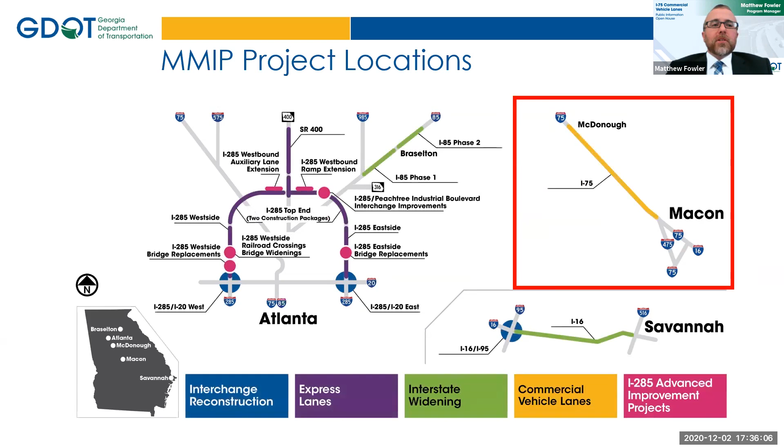...shows where the MMIP projects are located. Many of the projects are located around Metro Atlanta, along I-285, up State Route 400, and I-85 north of Atlanta. We have 2 projects near Savannah to widen I-16 and improve the interchange of I-16 and I-95 as the Port of Savannah continues to grow. The I-75 CVL project south of Atlanta on I-75 will construct commercial-only vehicle lanes along I-75 northbound from I-475 north of Macon to the vicinity of State Route 155 near McDonough. This map shows the gravity these projects will have on many of Georgia's metro regions across the state.

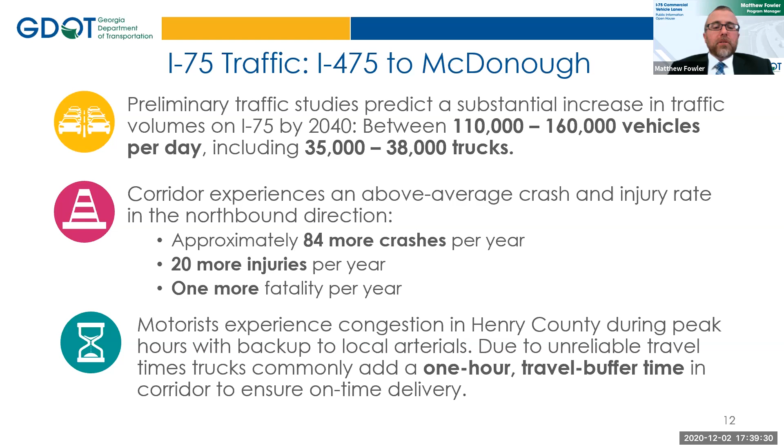Preliminary traffic studies predict a substantial increase in traffic volumes on I-75, with between 110,000 to 160,000 vehicles per day, including 35,000 to 38,000 trucks. This corridor experiences an above average crash and injury rate in the northbound direction. With all this movement of freight, combined with significant expansion of the Port of Savannah and continued population growth in Metro Atlanta, traffic volumes, congestion, crashes, and injuries are rising and will continue to increase unless addressed.

And now a project overview. The I-75 Commercial Vehicle Lanes project includes the design and construction of commercial vehicle only lanes, CVLs for short, along I-75 northbound from I-475 north of Macon to the vicinity of State Route 155 near McDonough, plus a new auxiliary lane on I-75 between State Route 155 and State Route 20. The proposed improvements involve the addition of 2 non-tolled commercial vehicle lanes.

The commercial vehicle lanes will be barrier separated from the existing general purpose lanes and will be located typically along the outside, the east side of the roadway, as depicted in the rendering below, except through the city of Forsyth urban limits, where the commercial vehicle lanes are proposed to transition to the median. Major structure work will be required to accommodate the new commercial vehicle lanes, including 27 new bridges, replacements, or widenings. Lastly, the project will accommodate future direct access ramps to a potential Bethlehem Road interchange in Henry County along I-75.

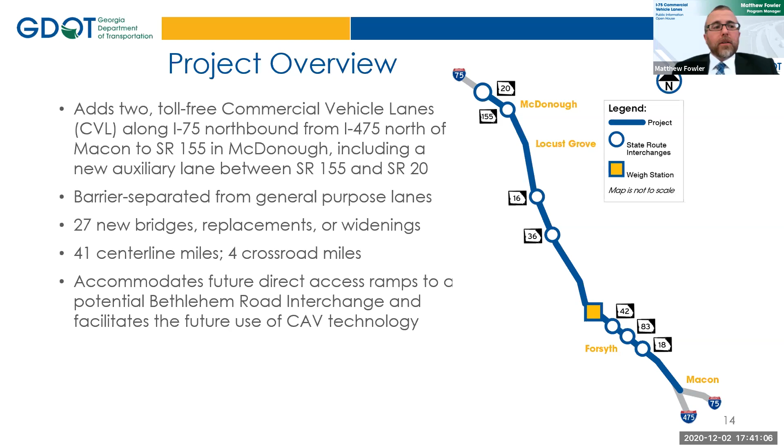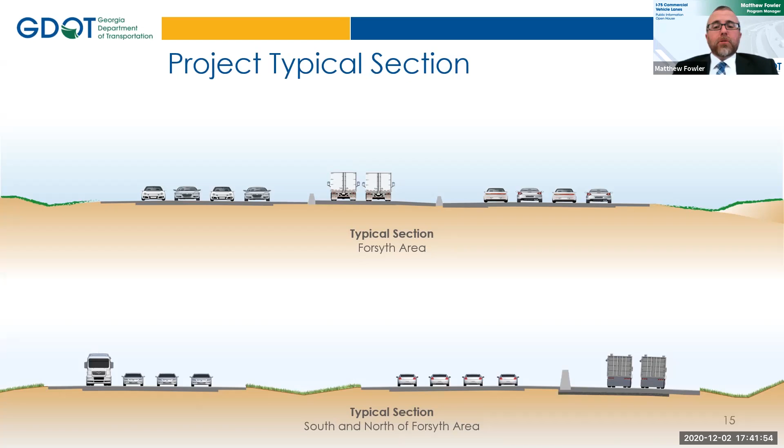As discussed on the previous slide, the new commercial vehicle lanes will generally be located along the existing outside northbound shoulder, as shown on the bottom of the screen. Within the Forsyth area between State Route 18 and State Route 83, the commercial vehicle lanes will move into the median to reduce impacts to the many businesses and residences located along the corridor. This is depicted on the top of the screen. It should be noted that no mainline work to I-75 is being proposed in the southbound direction anywhere in the corridor, and the existing number of travel lanes will not be reduced in either direction.

This project is the first of its kind in the country due to the project being non-tolled truck-only lanes. The commercial vehicle lane project will improve the safety and mobility for all users by separating commercial vehicles and passenger vehicles. The commercial vehicle lanes promote freight mobility from the Port of Savannah and promote continued economic development along the I-75 corridor. Georgians will benefit greatly from this project by reductions in delay through added capacity, increased safety by separating passenger car and freight traffic, and improved freight mobility, maintaining Georgia's competitiveness throughout the region.

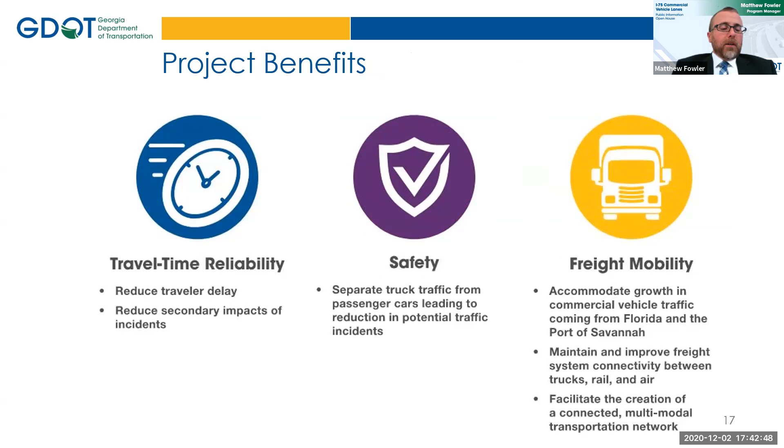The project will consist of an approximate 41-mile-long new roadway construction alongside existing I-75 that begins just south of the I-475/I-75 interchange north of Macon and spans through 5 counties. The department has developed a preliminary access and signage plan for trucks to enter and exit the commercial vehicle lanes. The main objective of the plan is to maximize truck utilization in the commercial vehicle lanes, thereby minimizing truck utilization of the existing general purpose lanes without precluding any truck access to the existing service interchanges via the general purpose ramps. This graphic and the following slide graphic illustrate the access points at the southern and northern termini, along with 6 intermediate entrance and exit access points.

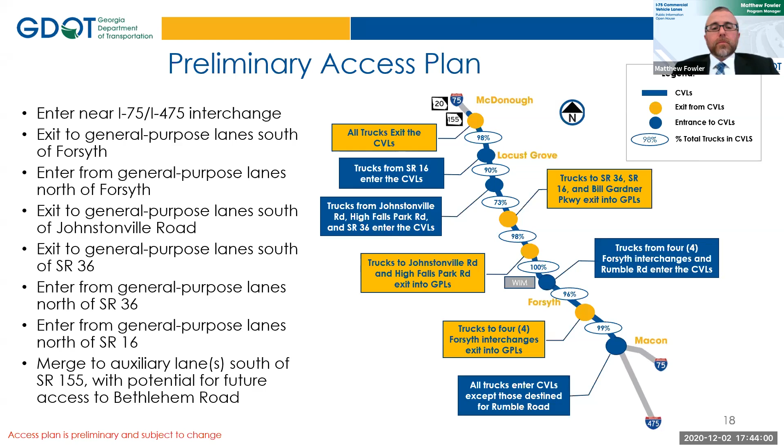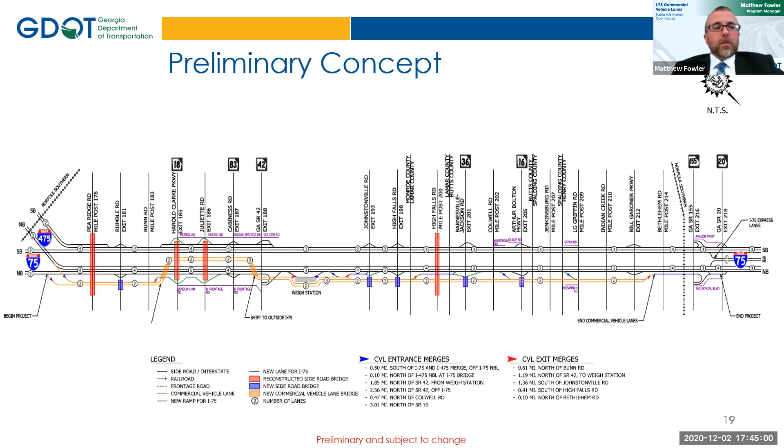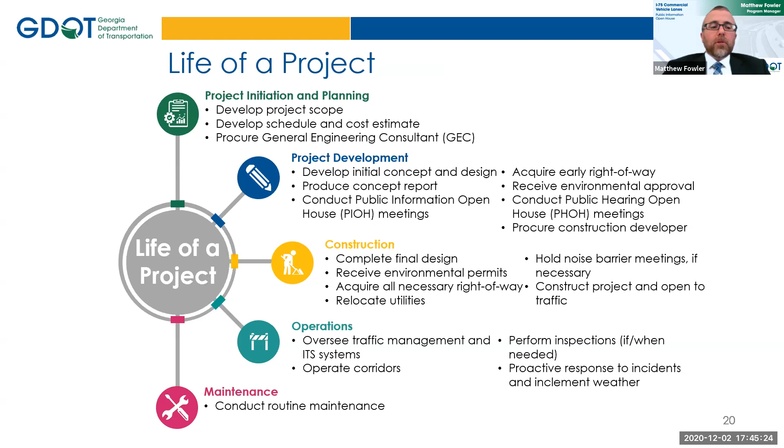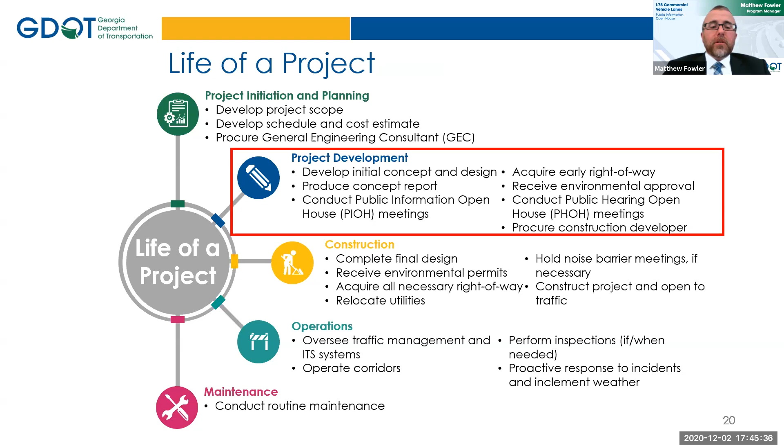Georgia DOT and all highway projects take many years to plan, design, and construct. And once a project is completed, the focus shifts to ongoing operations and maintenance. A transportation project like the I-75 commercial vehicle lanes requires a lot of people to bring the project to life. Currently, the I-75 commercial vehicle lane project is in the project development phase, and we will discuss a number of these current and upcoming activities in the next few minutes.

The department is working diligently to complete the concept work by the end of the year following this public information open house. Concurrent with and following the concept development phase for a period of approximately a year and a half, the project team will be focused in on preparing environmental documents needed to obtain federal approval under the National Environmental Policy Act, expected in the third quarter of calendar year 2022.

The project is currently anticipated to be procured as a design, build, finance, operate, maintain delivery method with the goal of developer selection by the first quarter of calendar year 2023. Construction is expected to start in the third quarter of 2024, with the commercial vehicle lanes set to open to traffic in 2028. Keep in mind the project schedule is subject to change.

Georgia DOT is responsible for reviewing projects and filing appropriate documentation to ensure that all projects comply with applicable federal and state historic preservation laws and regulations. Ensuring that a project's impact on these resources is minimal can make for a potentially lengthy process. GDOT's Office of Environmental Services, including cultural resources, ecology, air quality and traffic noise analysis, and NEPA specialists, continue to develop new methods to streamline the processes.

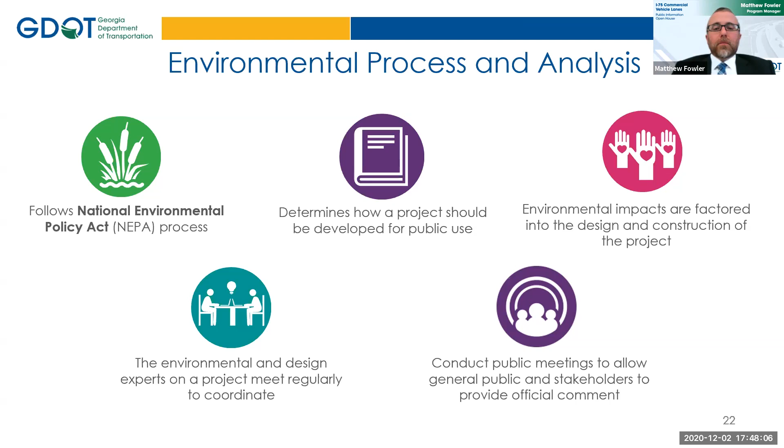Public participation is an integral part of the transportation process and facilitates decision-making that is in consideration of and to benefit public needs and preferences. Public participation brings GDOT closer to the public's vision of ideal transportation in Georgia. To view the most recent project materials, please contact us or visit our public involvement website, as noted on the screen.

Once at the website, join the virtual meeting room to explore our displays and videos that we would typically share at an in-person meeting. The type of information that you will be able to find includes project design, potential detours, environmental impacts, including noise and air, potential property acquisitions, and options for submitting a public comment.

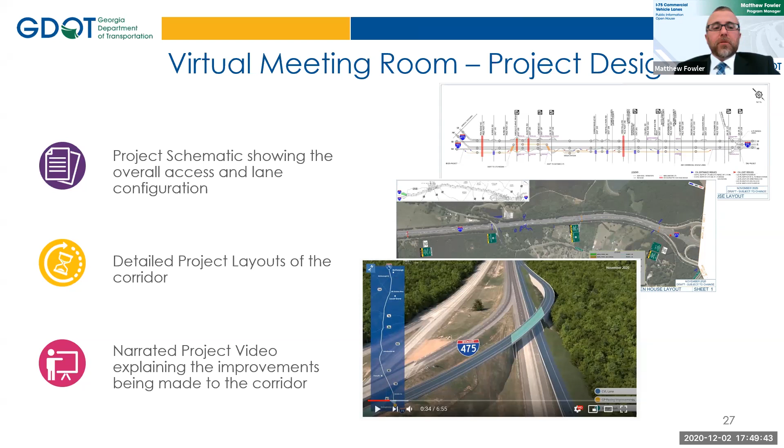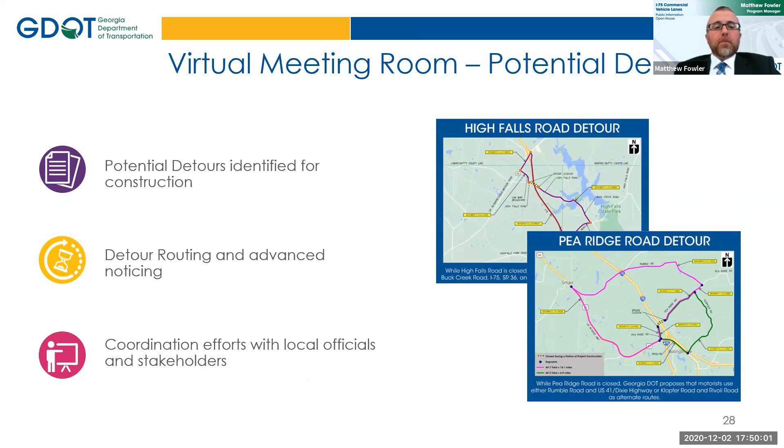In the project design virtual meeting room, you will be able to see the design as it stands now in schematic form and through detailed project layout sheets. In addition, a short narrated 3D fly-through video of the corridor improvements has been developed to assist the public in visualizing the work. In the potential detours virtual meeting room, you'll be given information on potential road closures and detours that are needed to build the project and the steps that will be taken by the project team to keep you and the local officials informed.

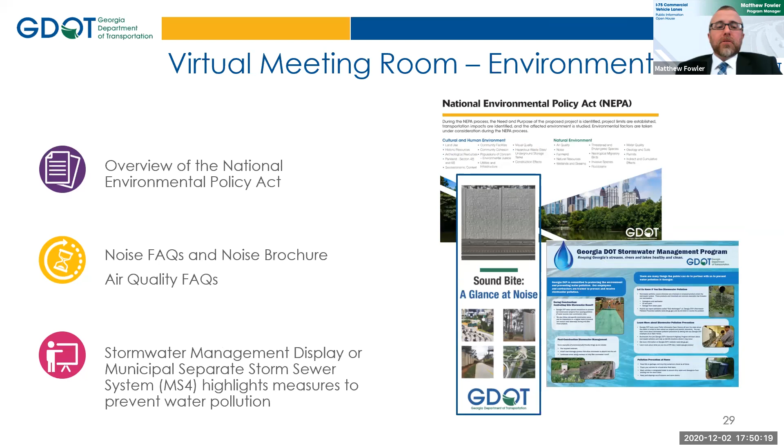In the environmental virtual meeting room, you will be able to learn about the NEPA Act, air quality, noise walls, and stormwater management practices used to prevent water pollution. In the property acquisition virtual room, you can learn more about the department property acquisitions. Georgia DOT strives to minimize property acquisitions and displacement during a transportation project's design phase. Unfortunately, impacts to property are sometimes unavoidable. As design progresses, Georgia DOT makes every effort to minimize the amount of right-of-way that is needed to the greatest extent possible.

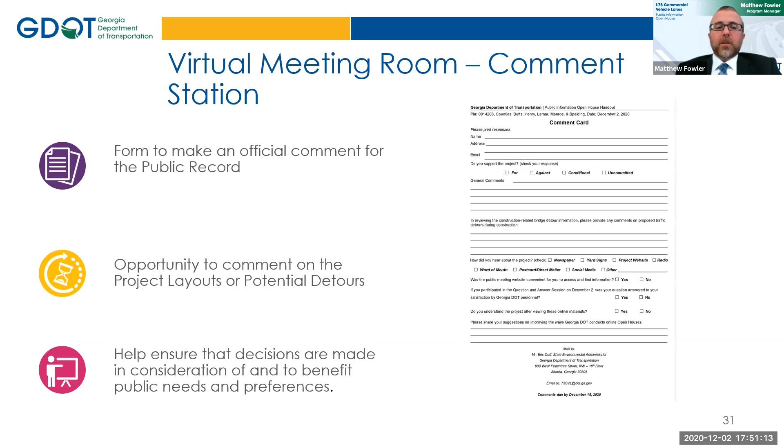Our last virtual room includes the comment form to make an official comment for the public record on the project layouts or potential detours. Your comments help ensure that decisions are made in consideration of and to benefit public needs and preferences. The project displays and plans will continue to be made available on the website noted on the screen.

To view the printed concept displays, please visit either of the locations noted on the screen, the Georgia DOT District 3 Area 4 office in Macon, the Henry County Administration Building in McDonough, and also the City of Forsyth City Hall as well. The displays will be available weekdays through December 15th from 9 a.m. to 4 p.m. Georgia DOT representatives will not be staffing these displays. However, you may submit questions or comments regarding the project to 75cvl@dot.ga.gov or call the project hotline at 678-528-7275.

While there are opportunities to enter questions in the Q&A during this live virtual event, you can also submit an official comment in one of these ways by December 15th, 2020. All comments submitted will be part of the public record. To share your comments on the project, please visit our website to complete an electronic survey, email the project, or mail your written comments to Eric Duff, GDOT State Environmental Administrator at the Georgia DOT at the address noted on the screen. While many of you may have already visited the project website, we will also direct you to comment electronically at the online electronic comment form at the address listed here.

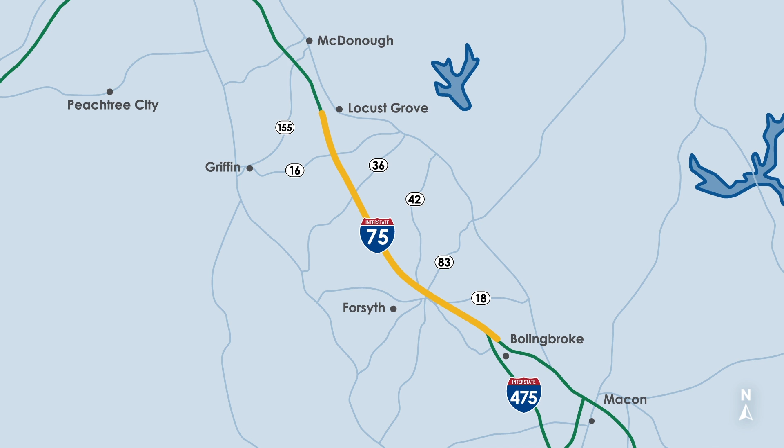The following is an artistic rendering and animation and may not be representative of the final design of the project. The planned I-75 commercial vehicle lanes, or CVL project, is located within Monroe, Lamar, Butts, Spalding, and Henry counties, spanning from Middle Georgia to the Metro Atlanta area.

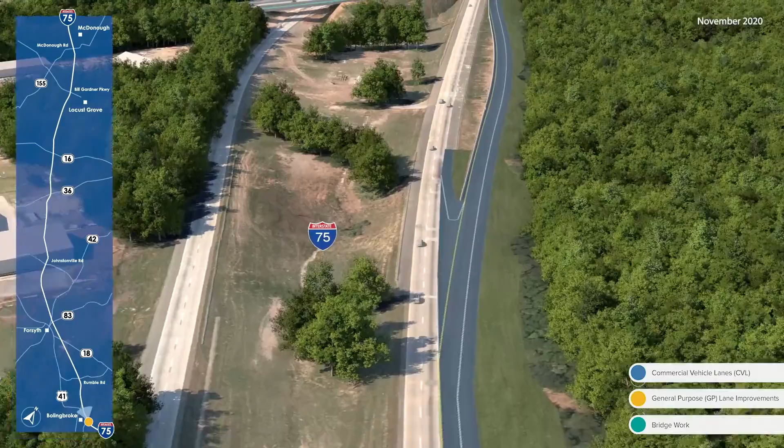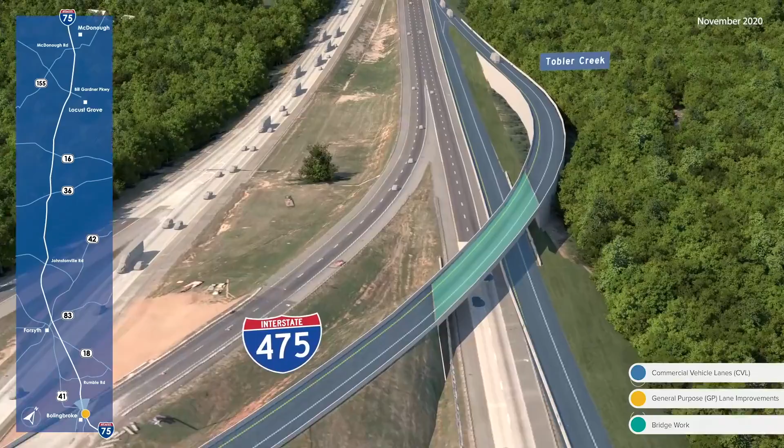The project begins with a new commercial vehicle or truck-only ramp from I-75 northbound, south of the I-475 interchange in Monroe County, which is immediately joined by a new commercial vehicle ramp from I-475 northbound. All trucks shall use these ramps to enter the CVL system except those destined for Rumble Road, who must remain on the existing main line or general purpose lanes.

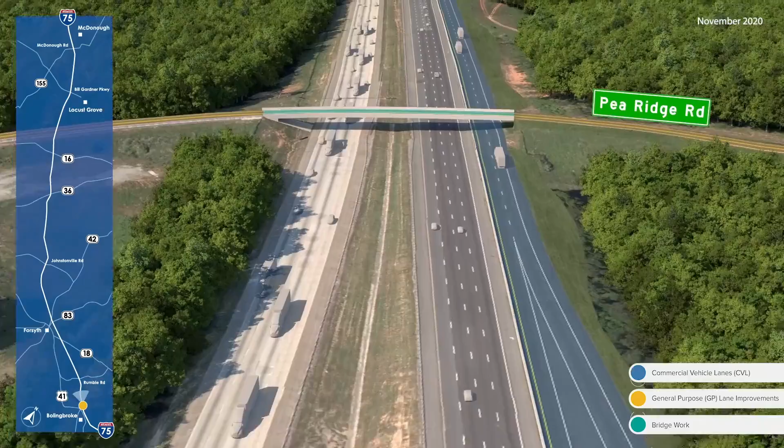Moving north through the project, the Pea Ridge Road Bridge overpass will be replaced to accommodate the new CVLs below. The replacement of this bridge will require an off-site detour. The two new CVLs will be barrier separated from the existing northbound general purpose lanes, creating separation between the two traffic streams.

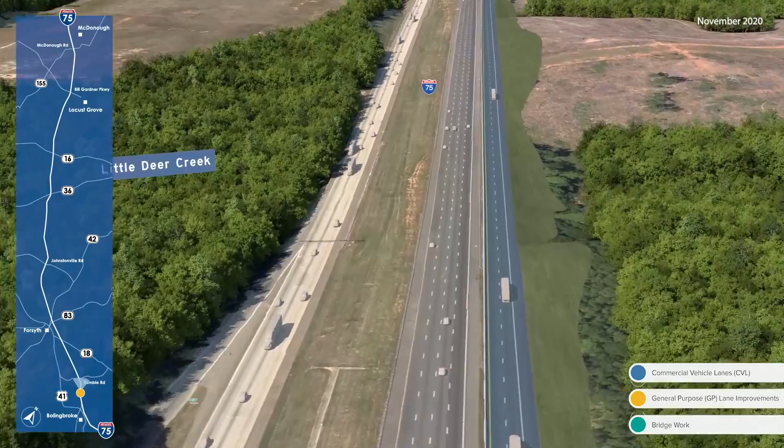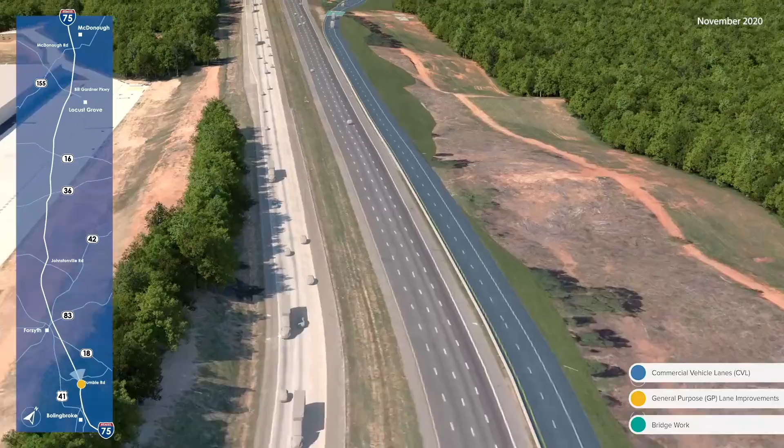The alignment of the CVLs shifts towards the outside at the approach to Rumble Road, the first of many interchanges in the corridor. The CVLs will pass under a new bridge built along Rumble Road. Once beyond the interchange, the CVL alignment rejoins the main line once again.

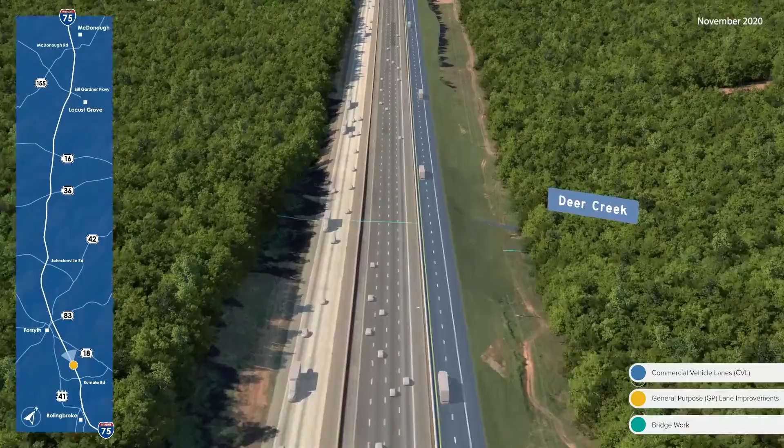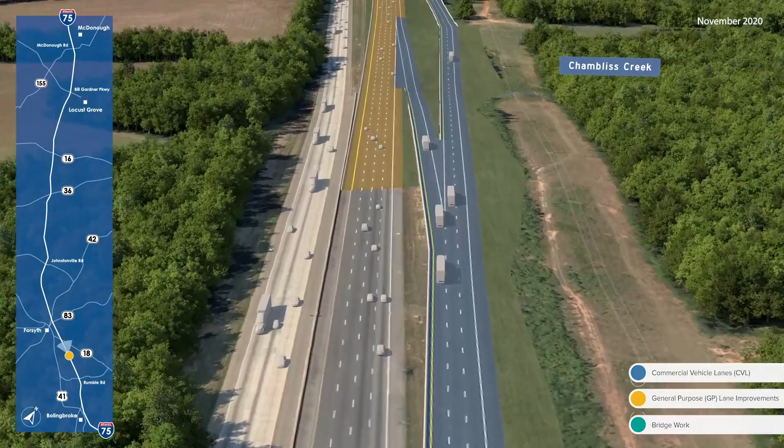The existing Bunn Road Bridge will remain, with modifications, to allow the new CVL facility to fit within its footprint. A ramp from the CVLs to the existing northbound general purpose lanes will be built for local truck access to the 4 interchanges serving the city of Forsyth. All trucks without a Forsyth destination would remain in the CVLs.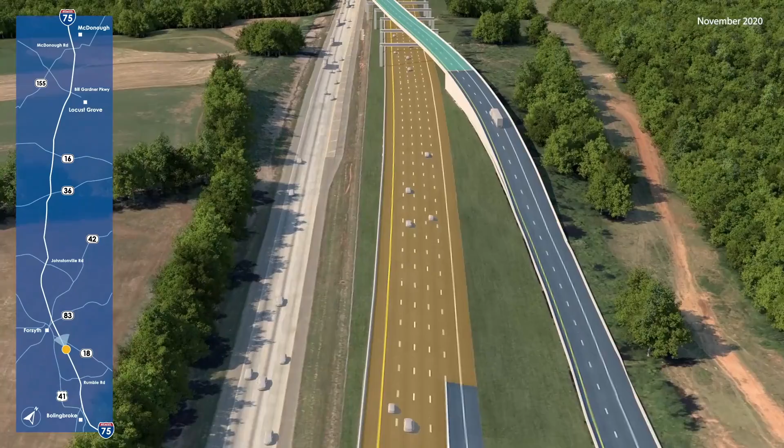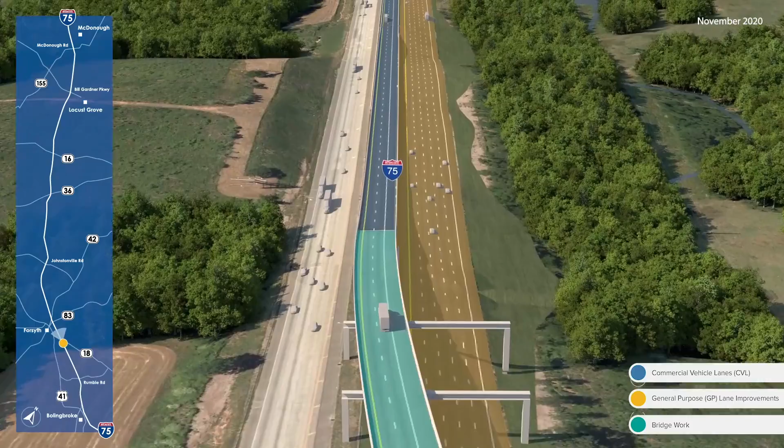Just south of the city of Forsyth, the CVLs are bridged over the general purpose lanes and shifted into the median for approximately 3 miles. This transition to the median results in a reduction in impacts to developed properties and businesses. The northbound general purpose lanes will be shifted and reconstructed to the outside to accommodate the new CVLs within the median.

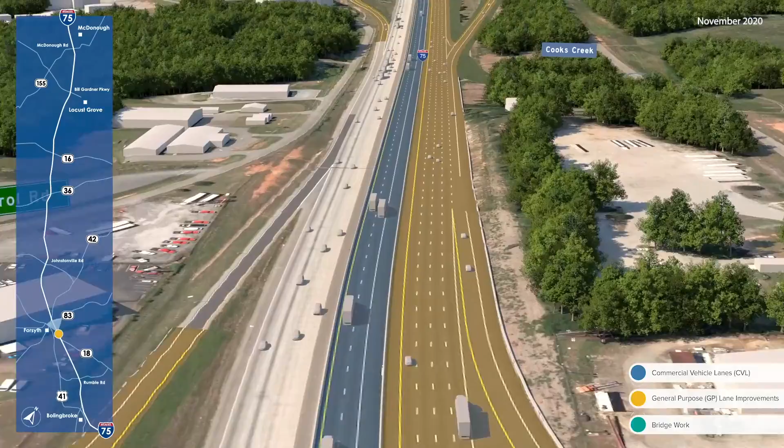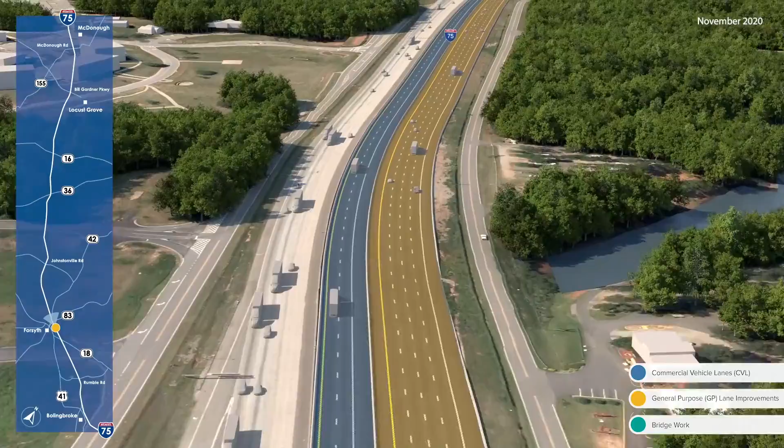The State Route 18 and Juliette Road bridges and interchanges will be reconstructed to allow the CVLs to pass through, but will retain their same general interchange configurations. Portions of North Frontage Road will be reconstructed with the alignment shifted to accommodate the on-ramp from Juliette Road. New I-75 bridges over State Route 83 will be constructed, and interchange ramps will be shifted slightly to make room for the widening roadway.

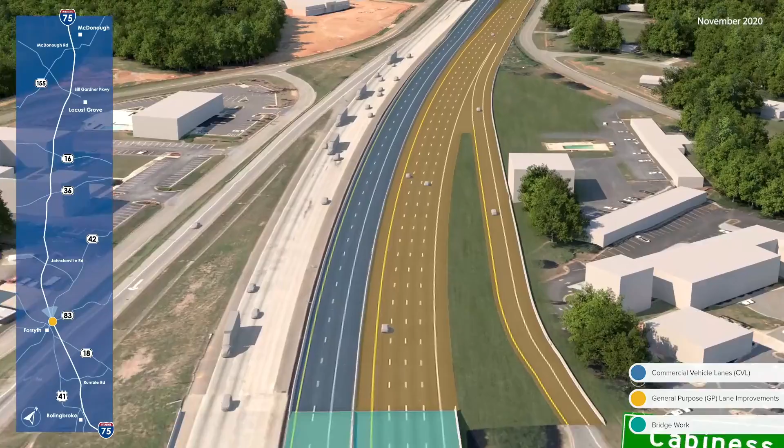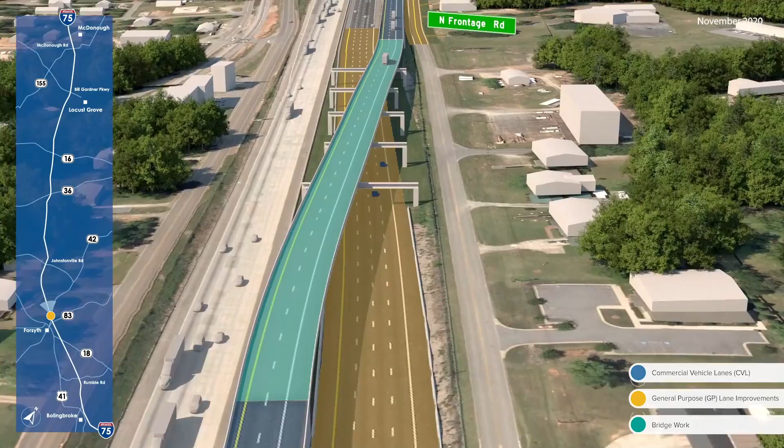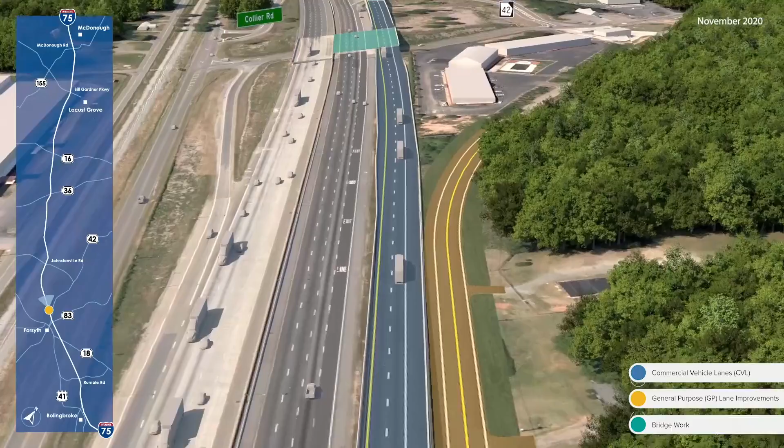The CVLs then bridge back over the northbound general purpose lanes to resume their course along the outside of the main line. Portions of North Frontage Road will be reconstructed to accommodate the new CVLs in this area. The work on I-75 has minimal impacts to the configuration of the State Route 42 interchange, as the new CVLs will bridge over the existing ramps to and from State Route 42.

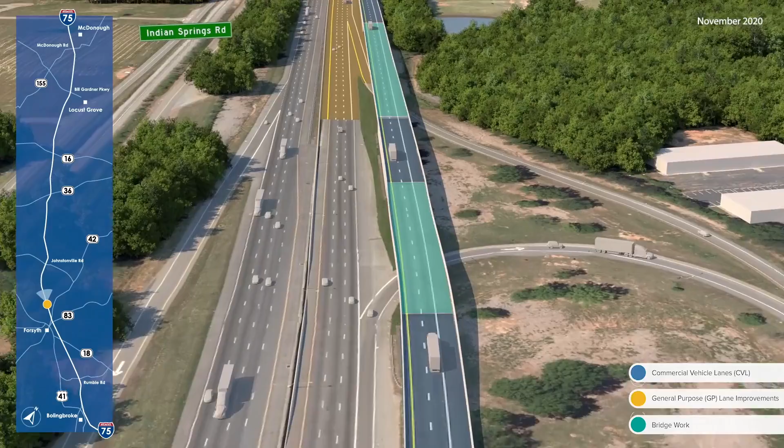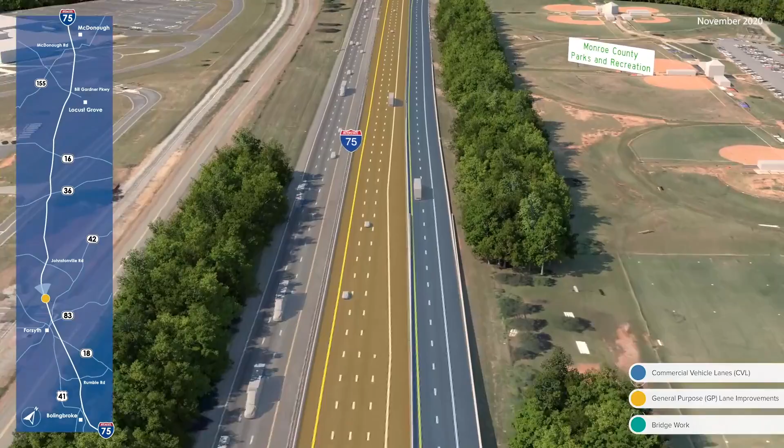Retaining walls will be strategically used in constrained areas of the corridor to avoid or mitigate impacts. One such example is at the Monroe County Parks and Recreation, where impacts to this regional park will be avoided. A system of ramps will be constructed for trucks to access the existing way station north of Forsyth and later rejoin the CVLs.

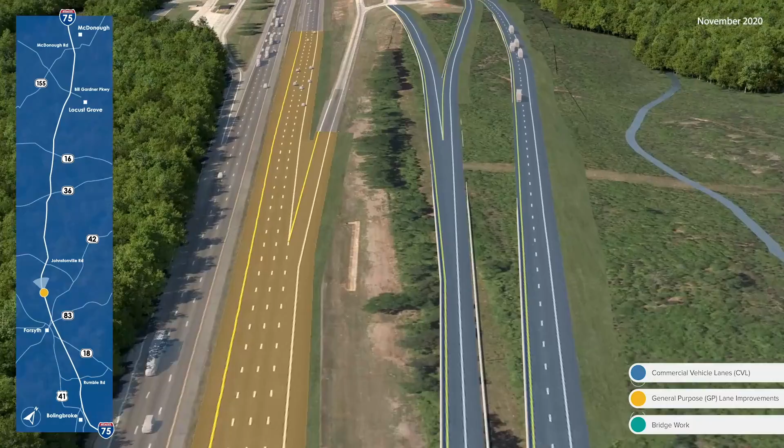The first intermediate slip ramp, or merge, into the CVL system is located north of the way station and will be used by all trucks originating from Forsyth. At this point in the corridor, all eligible trucks must be in the CVLs, providing an ideal enforcement area for law enforcement.

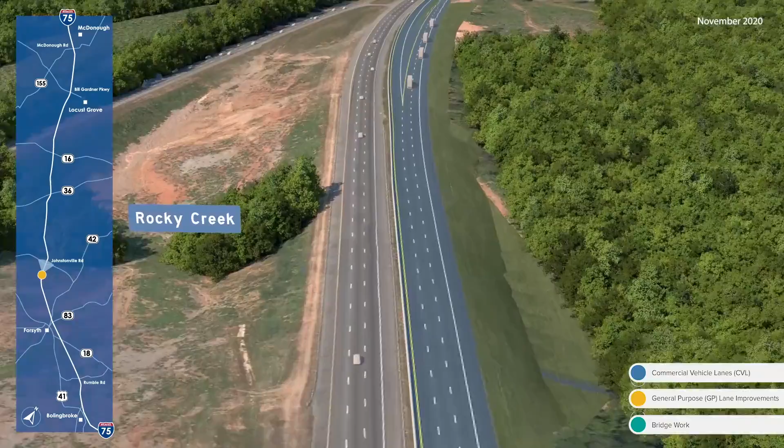Immediately to the north is a slip ramp from the CVLs to the general purpose lanes, which will be used by trucks with local destinations to Johnstonville Road and High Falls Road. All other trucks should remain on the CVLs.

The alignment of the CVLs shifts towards the outside at the approach to Johnstonville Road. The CVLs will pass under a new bridge built along Johnstonville Road. Beyond the interchange, the alignment of the CVLs rejoins the main line once again.

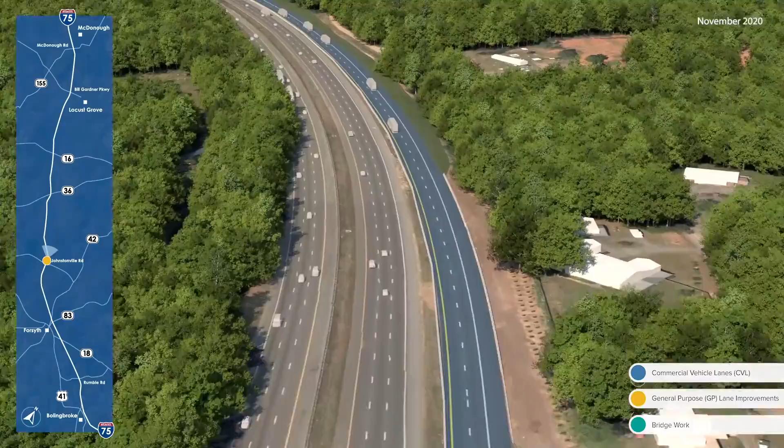These CVLs can ease congestion and reduce the interaction between passenger vehicles and trucks, thereby reducing the number of incidents. This in turn will improve the reliability of the corridor and reduce travel time for trucks.

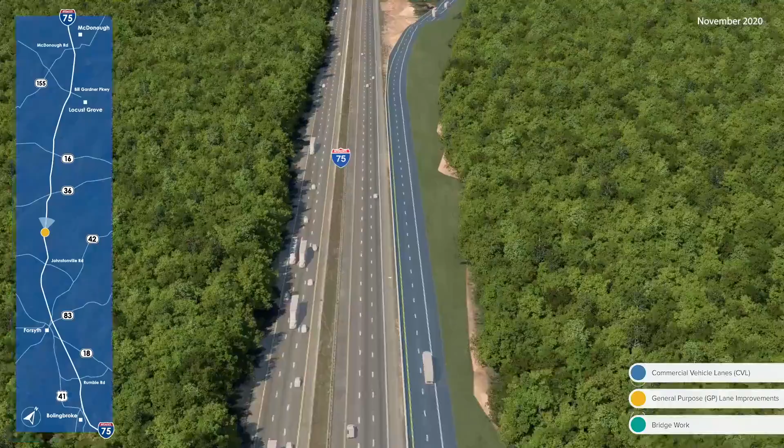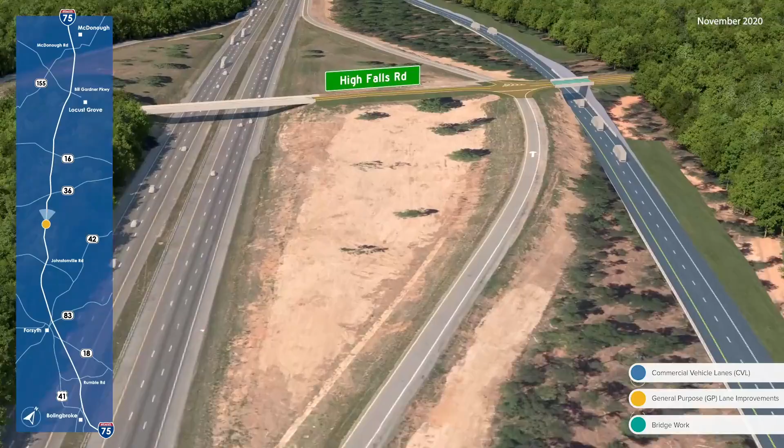Similar to the treatment at Johnstonville Road, the alignment of the CVL shifts towards the outside at the approach to High Falls Road. The CVLs will travel under a new bridge built along High Falls Road. Once beyond the interchange, the alignment of the CVLs rejoins the main line once again.

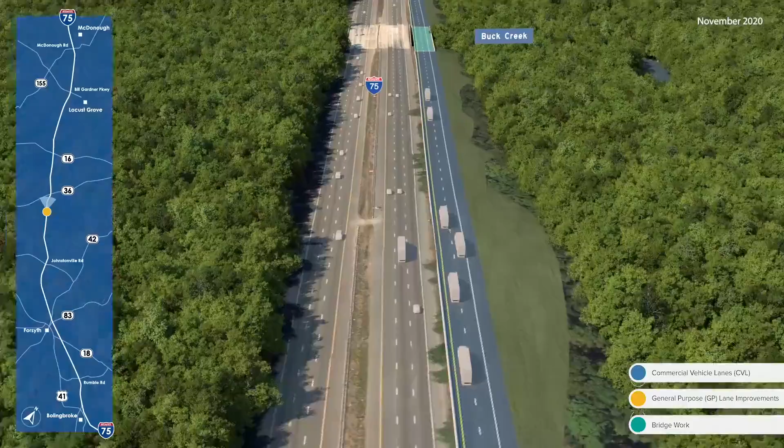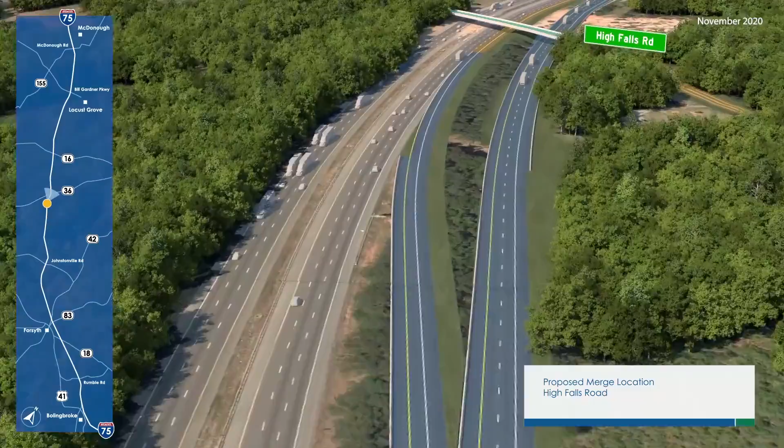A new slip ramp from the CVLs to the general purpose lanes will be used by trucks heading to State Route 36, State Route 16, and Bill Gardner Parkway. All other trucks not destined for these 3 local exits must stay in the CVLs. The High Falls Road Bridge overpass will be replaced to accommodate the CVLs below. The replacement of this bridge will require an off-site detour.

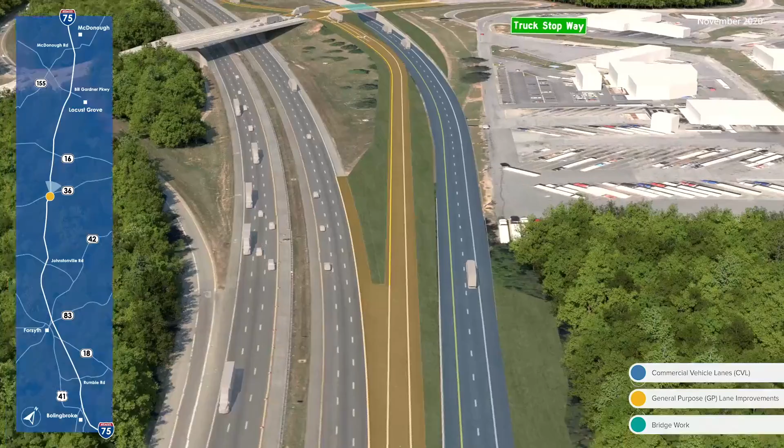The alignment of the CVL shifts towards the outside at the approach to State Route 36. The CVLs will pass below a new bridge constructed along State Route 36, and the northbound ramps will be shifted towards the main line. Once beyond the interchange, the alignment of the CVLs rejoins the main line once again.

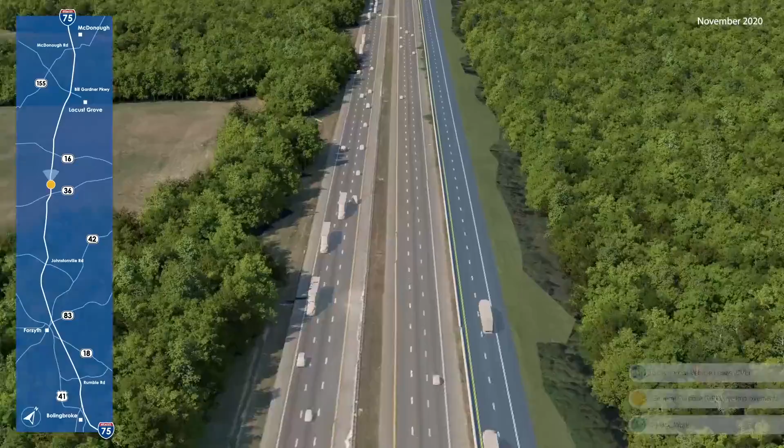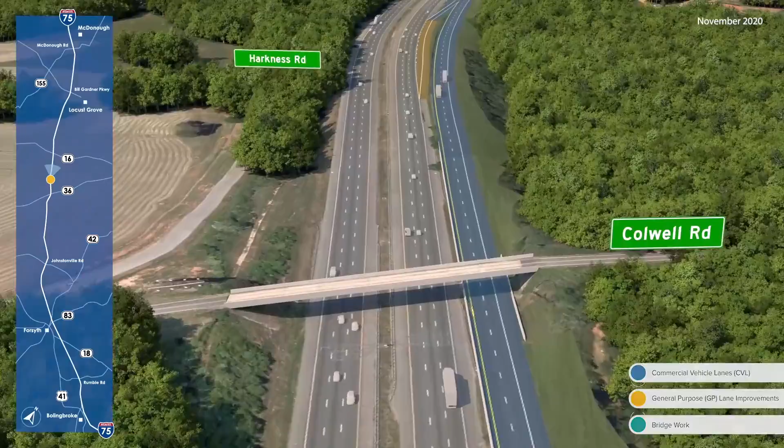The existing Colwell Road Bridge will remain with modifications to accommodate the CVL facility within its footprint. Another intermediate slip ramp or direct merge into the CVL system is located north of Colwell Road and will be used by all trucks originating from Johnstonville Road, High Falls Road, and State Route 36.

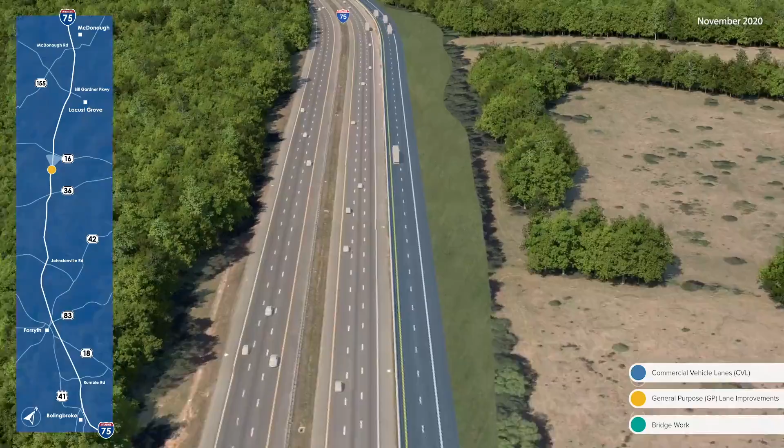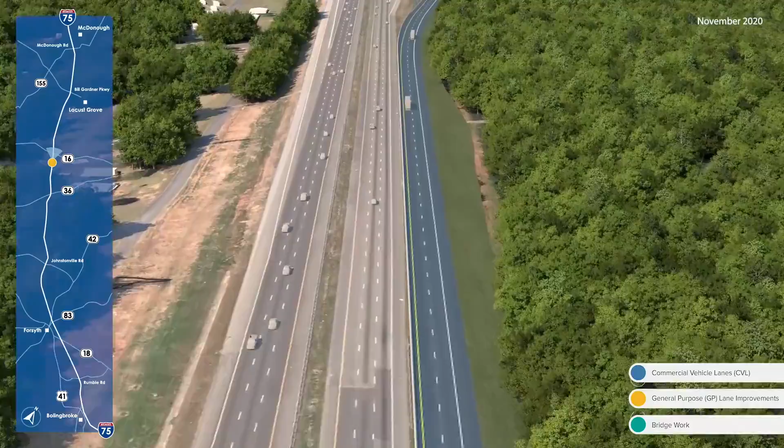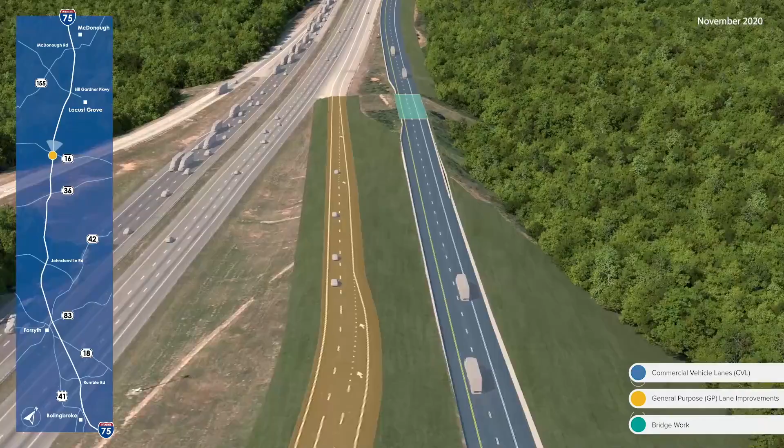The alignment of the CVL shifts towards the outside at the approach to State Route 16. The CVLs will travel under a new bridge built on State Route 16, and the northbound ramps will be shifted towards the interstate. Once beyond the interchange, the alignment of the new lanes rejoins the main line once again. The two new barrier-separated CVLs continue adjacent to the general purpose lanes into Spalding County.

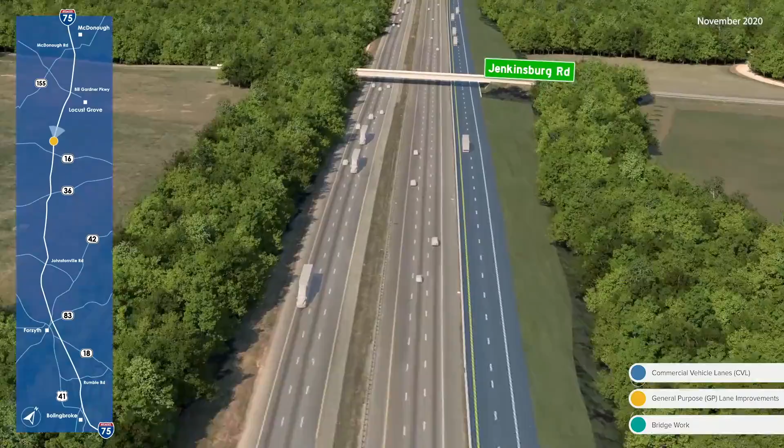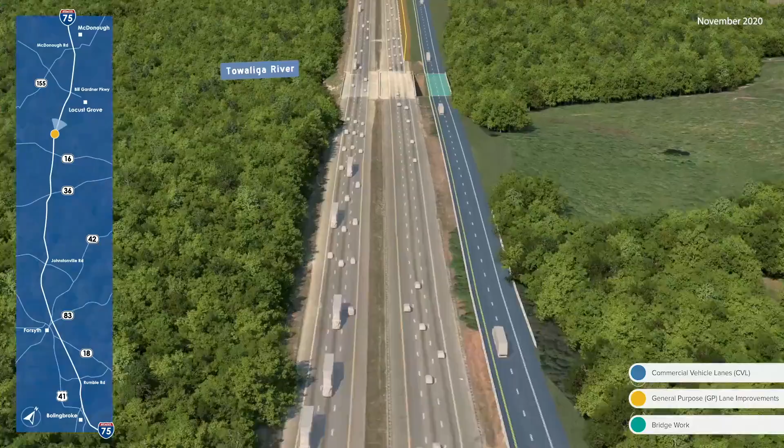The existing Jenkinsburg Road Bridge will remain, with modifications to accommodate the new CVL facility within its footprint. At the Henry County line, the new CVLs are bridged over the Towaliga River to minimize impacts to the waterway. The final intermediate slip or direct merge into the CVL system is located in Henry County and will be used by all trucks originating from State Route 16.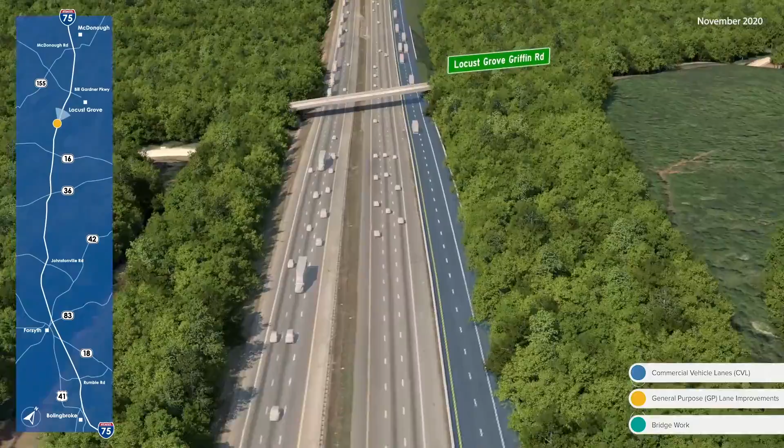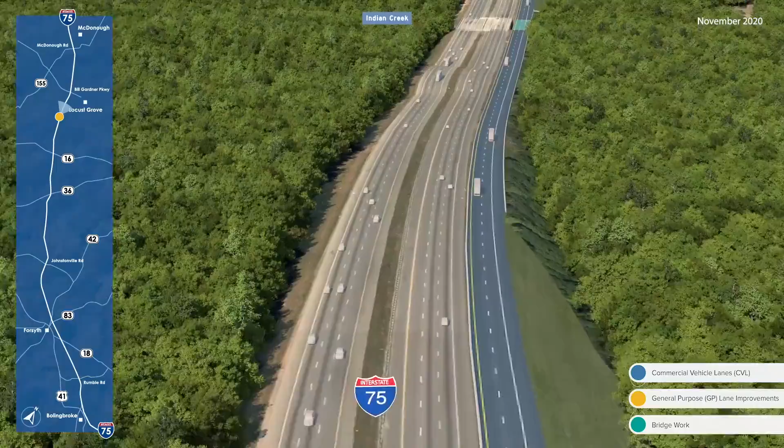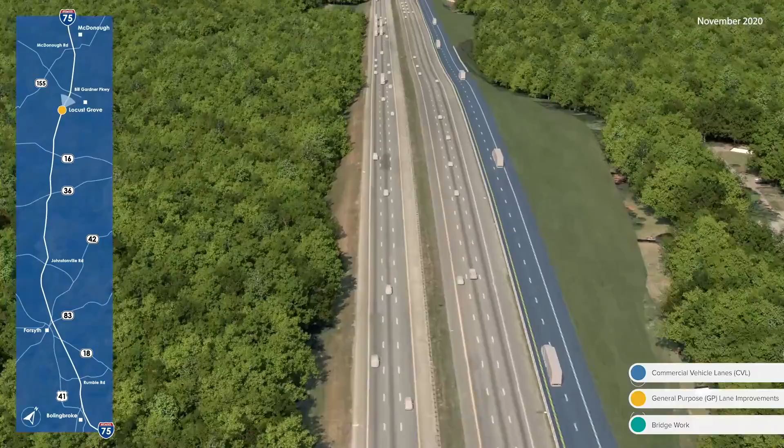The existing Locust Grove Griffin Road overpass and nearby Indian Creek bridges will remain with modifications to accommodate the new CVL facility within the bridge footprints. Traffic analysis and studies indicate that these new CVLs should ease congestion and reduce the interaction between passenger vehicles and trucks, thereby reducing the number of incidents. This in turn will improve the reliability of the corridor.

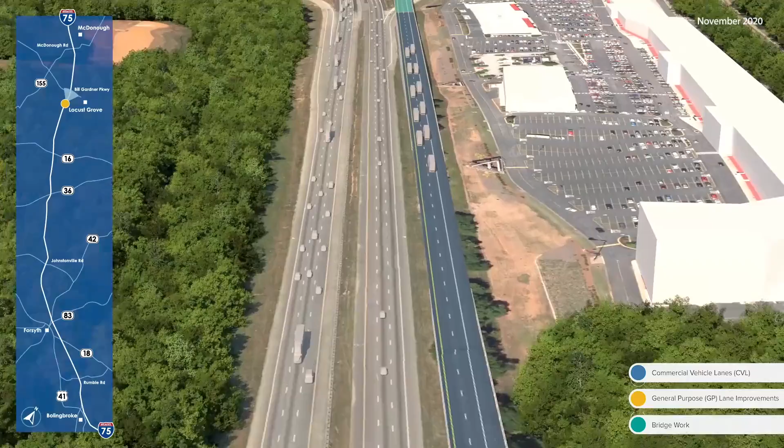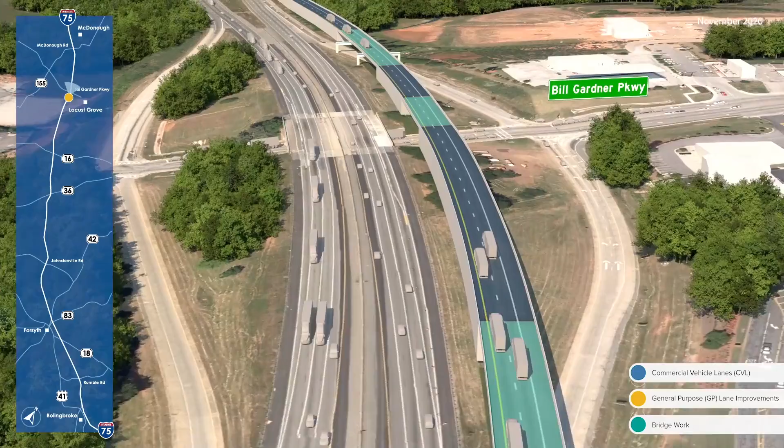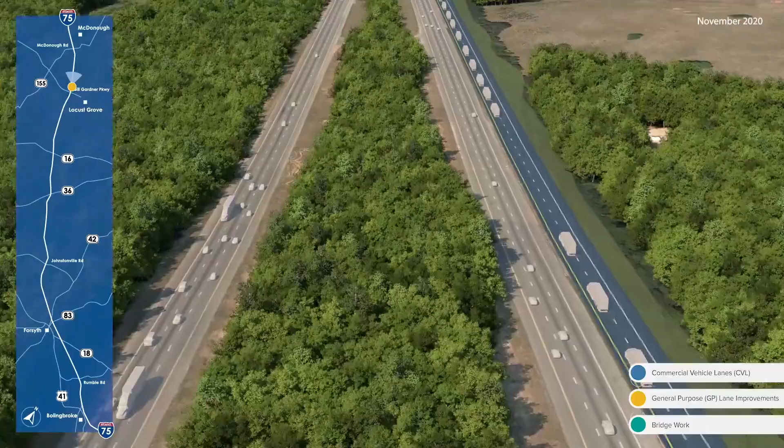Unlike most of the other crossings throughout the corridor, I-75 travels over Bill Gardner Parkway. As such, the CVLs will be bridged over Bill Gardner Parkway and its northbound interchange ramps. The CVLs end near Bethlehem Road by merging the two CVLs into one and constructing a new auxiliary lane that will allow trucks destined for State Route 155 to remain in the outside lane. The intent of this work would be to improve traffic operations for both passenger vehicles and trucks destined for State Route 155.

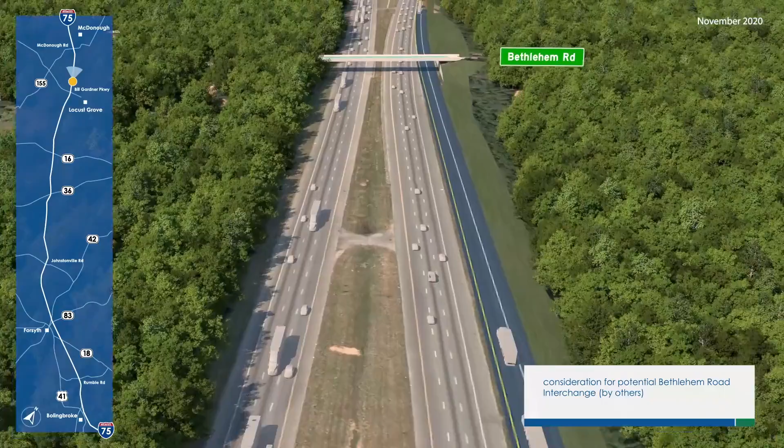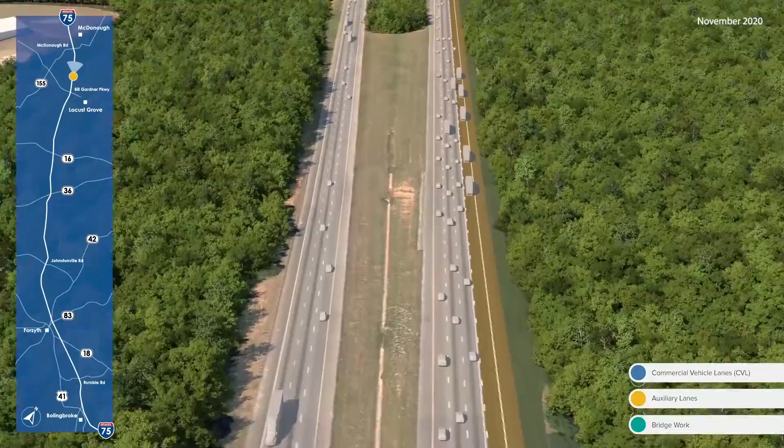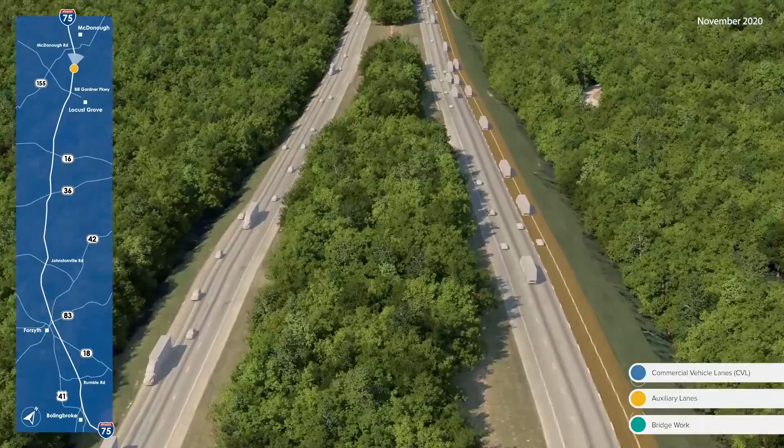The existing Bethlehem Road Bridge overpass will remain with modifications to accommodate the new CVL facility within the bridge footprint. Separate from this project, the Georgia Department of Transportation is studying a new interchange at Bethlehem Road, PI number 0017182. The intent of this work would be to improve traffic operations along State Route 155 by providing an additional access to and from I-75 between Bill Gardner Parkway and State Route 155 interchanges. More information on this separate Bethlehem Road interchange project will be provided when it becomes available.

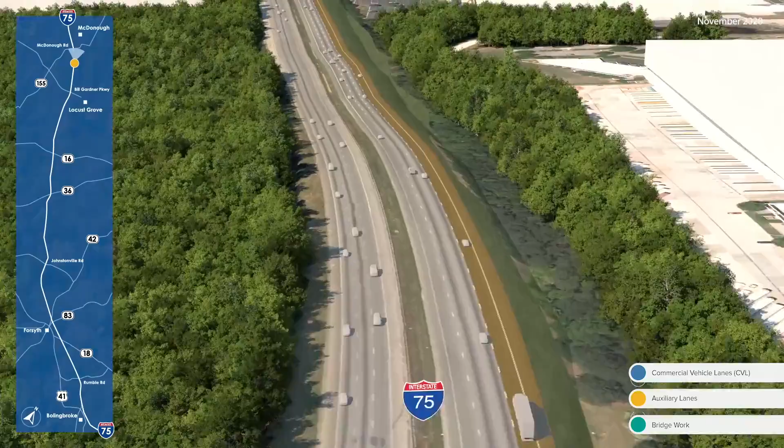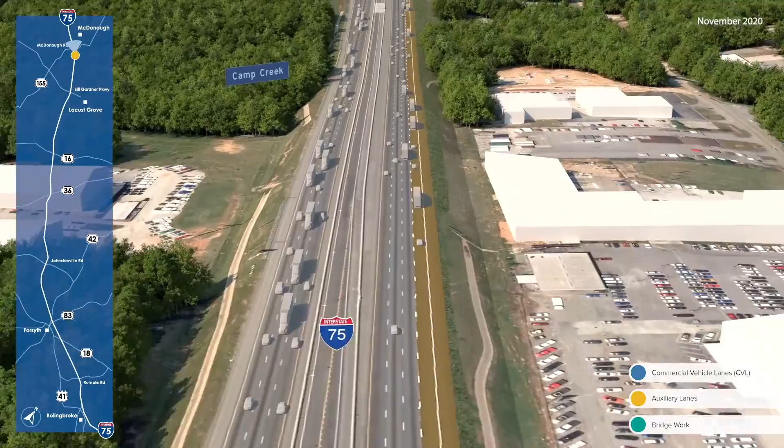A new auxiliary lane is planned to be constructed between the northbound on-ramp from State Route 155 and the off-ramp to State Route 20 to alleviate congestion in this area and improve traffic operations. This work concludes the improvements planned for this critical transportation infrastructure project.